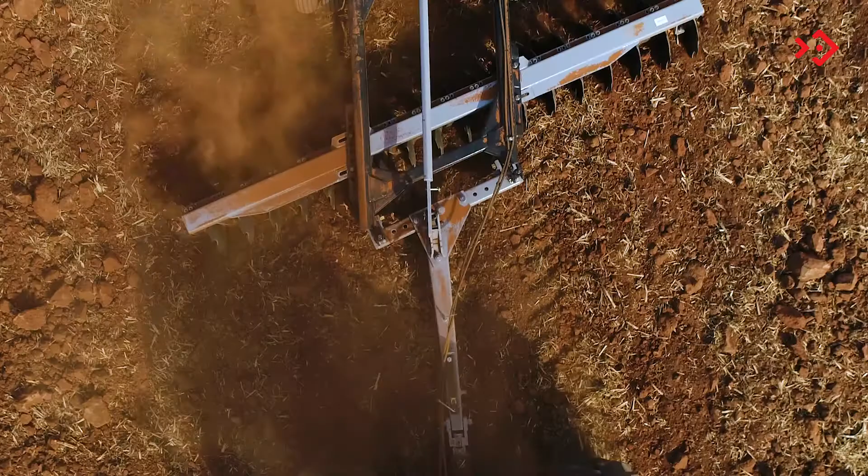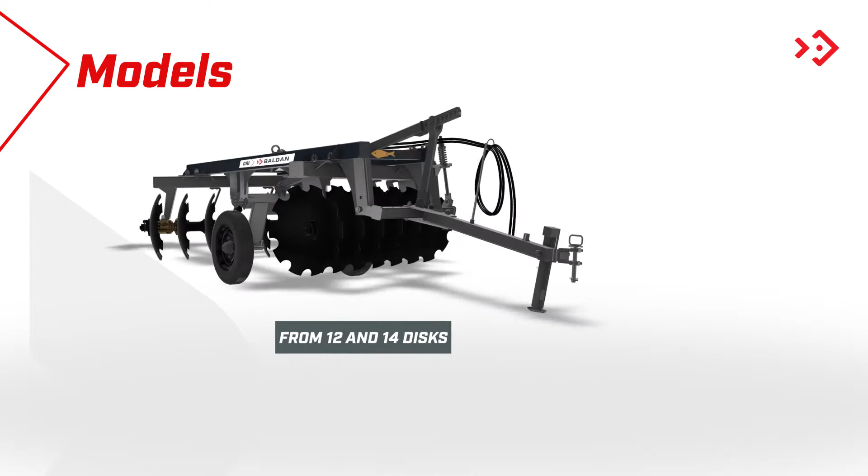Today, let's take a look at the CRI, a harrow with excellent performance in the preparation of various types of soil and excellent work performance. The CRI comes in 3 categories: 12 and 14 discs, 16 to 30 discs, 32 to 44 discs. These category variations serve the small, medium, and large producer.

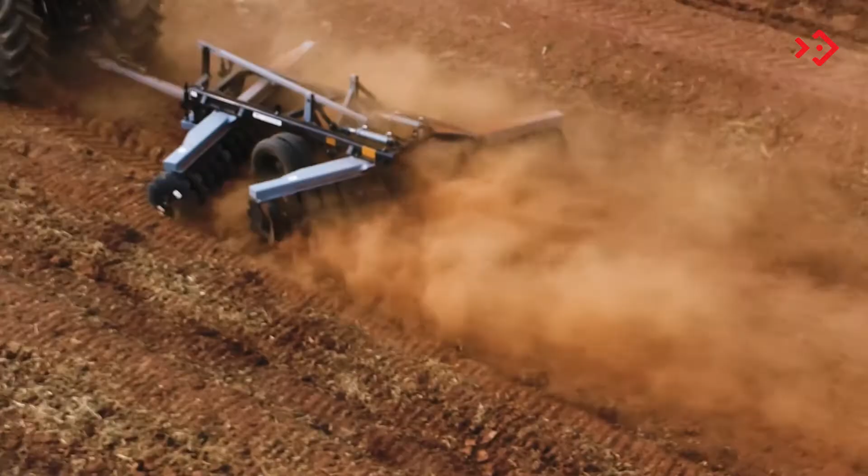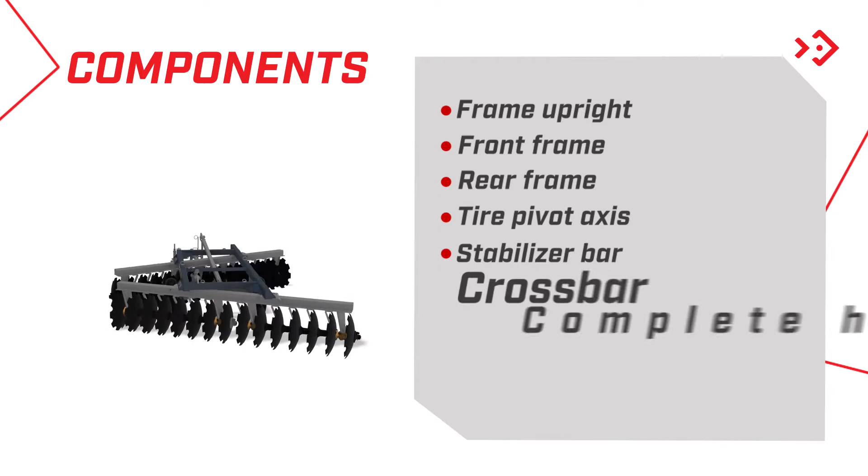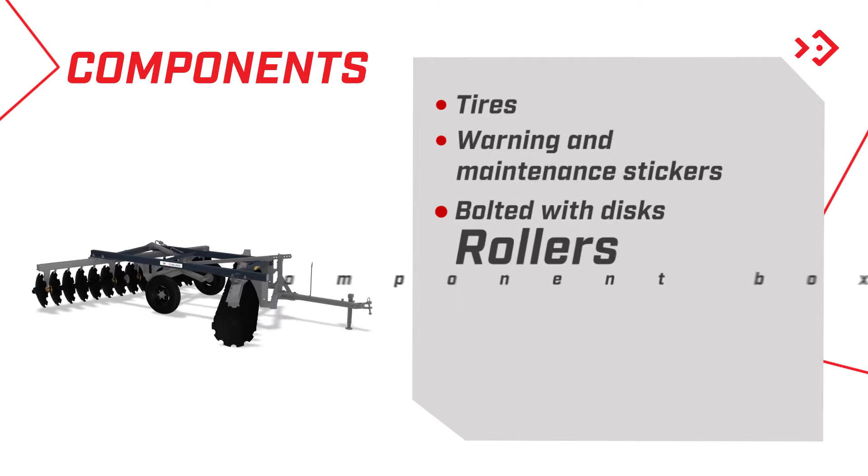To ensure that nothing important is missing from the assembly, I will pass on its main components here. Come on! Frame upright. Supports the harrow frames. Front frame. Supports the front section of the discs. Rear frame. Supports the rear section of the discs.

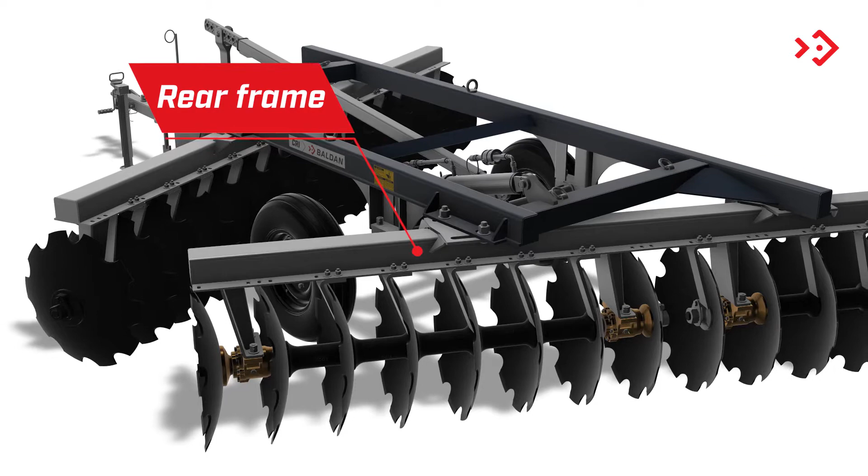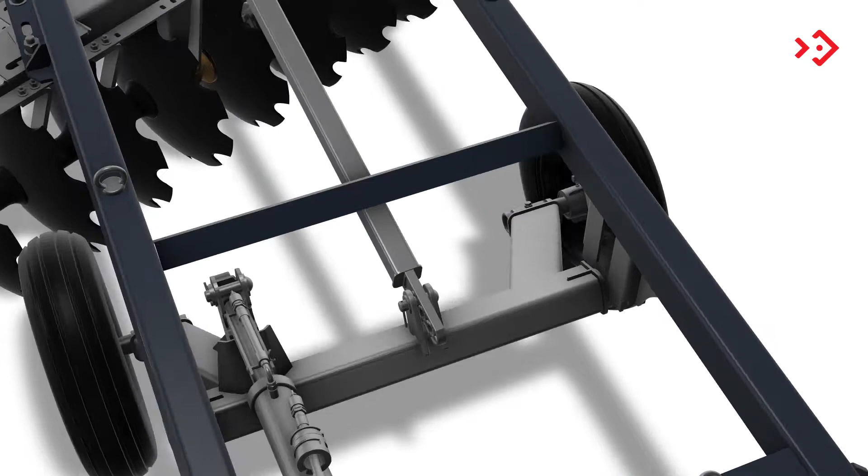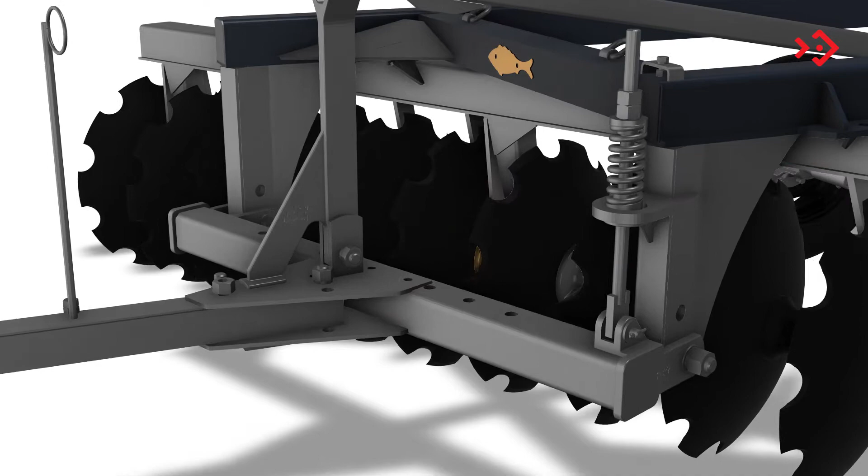Tire pivot axis. Connects the wheel to the harrow. Stabilizer bar. Levels the harrow during transport and assists the operator during coupling. Crossbar joins the harrow to the header. Complete coupling header joins the harrow to the tractor through the crossbar.

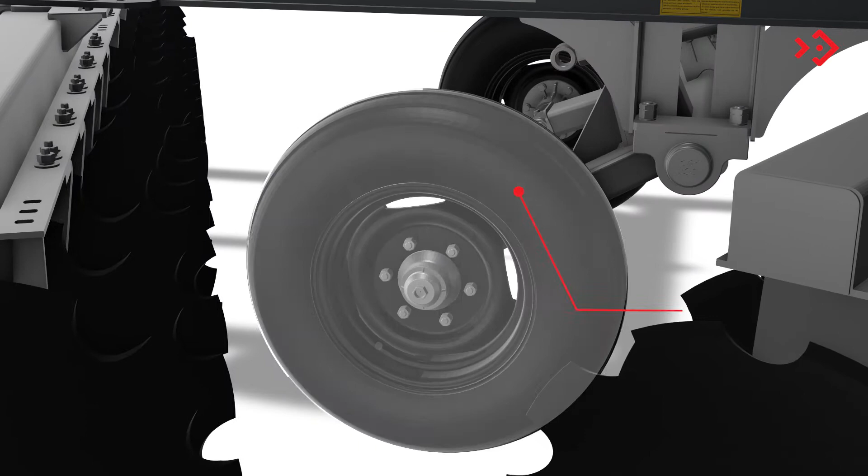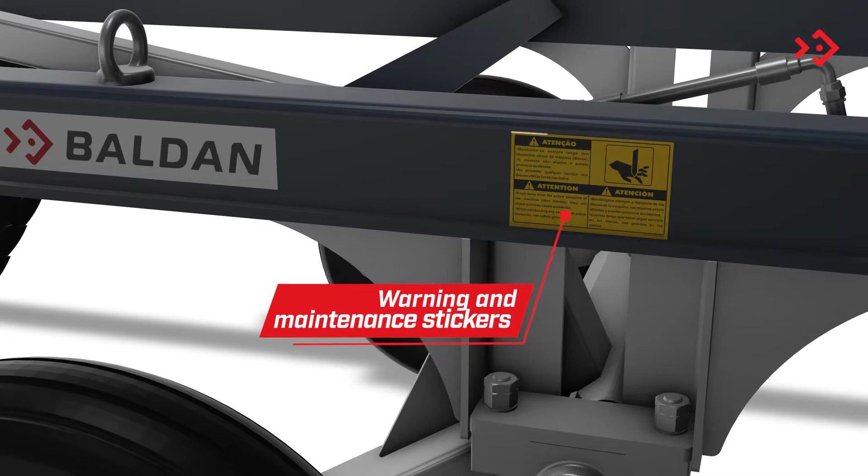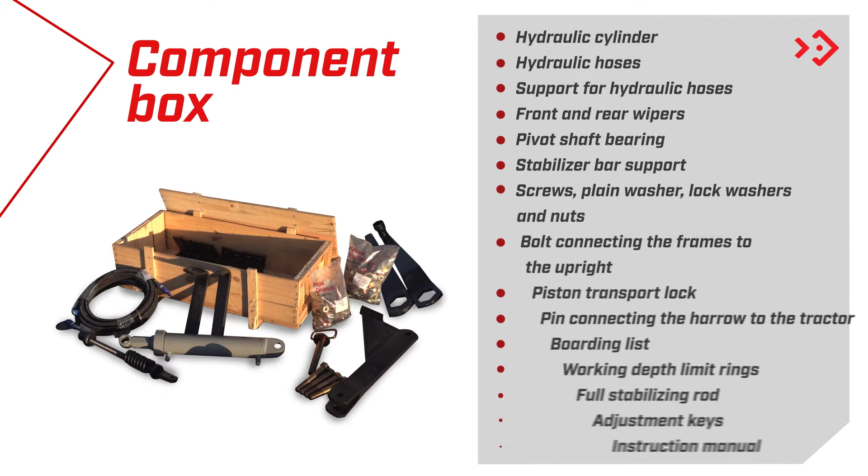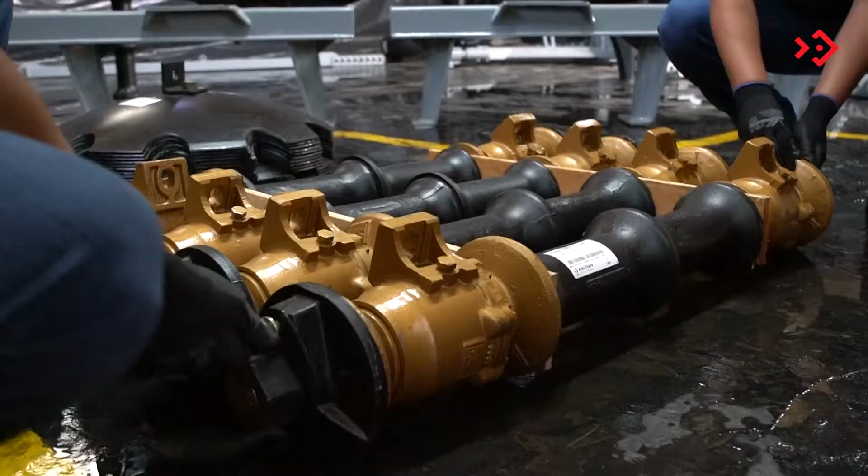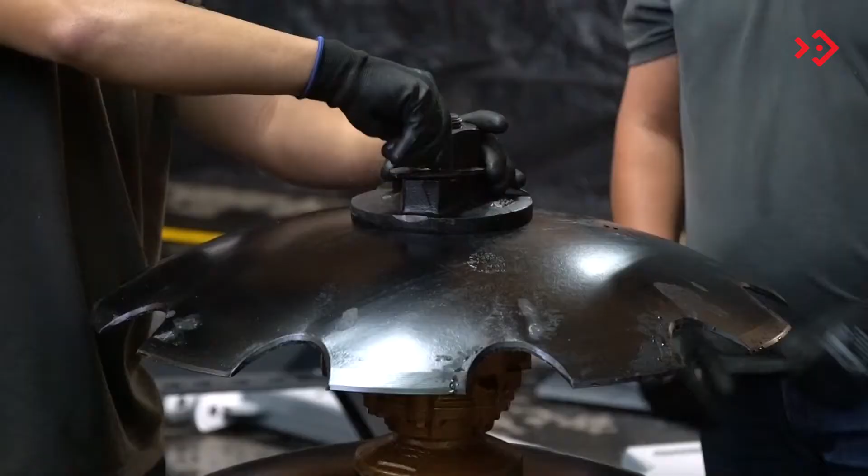To facilitate transport and optimize the value of freight, the CRI leaves the factory disassembled, okay? When receiving the harrow, you need to follow some important steps to get it ready for the first use. First, assemble the disc sections according to the model purchased. Repeat the process for all sections.

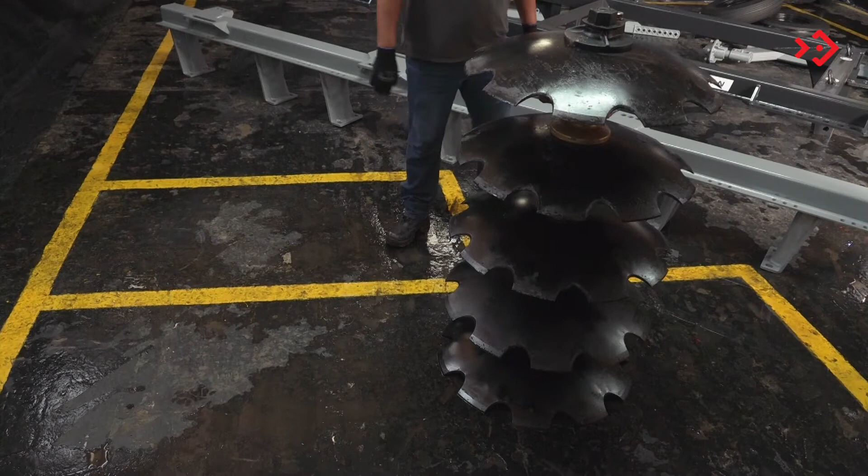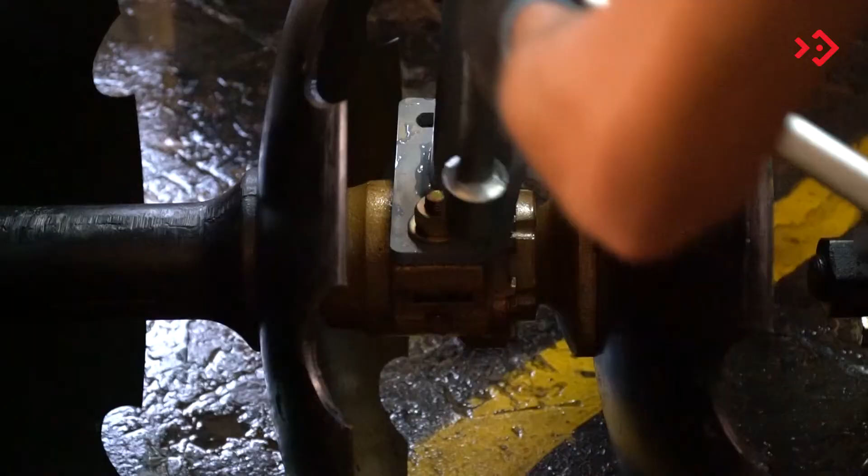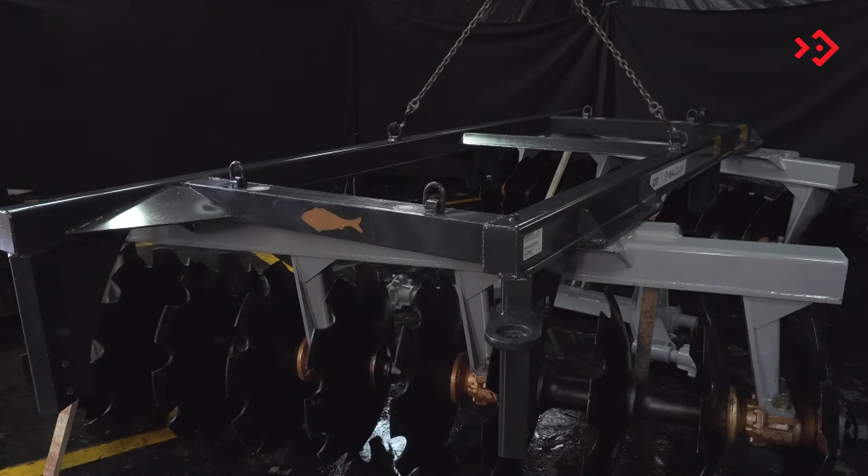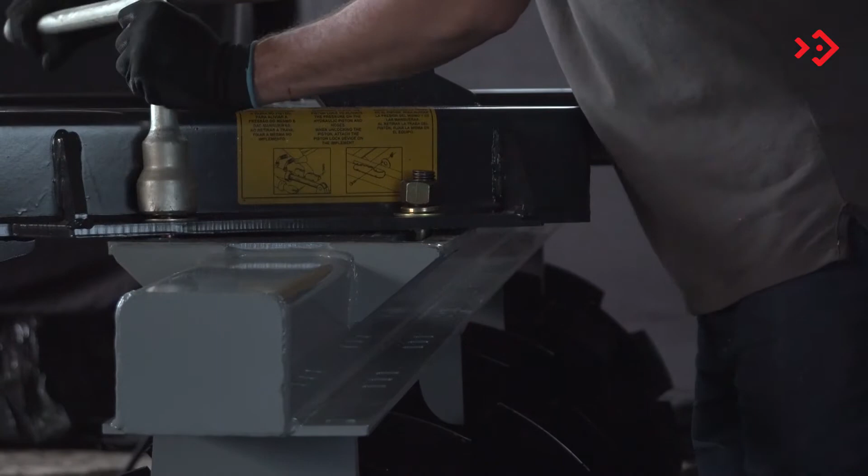Then, place the front and rear frames on the disc rollers. Then, connect the front and rear frames to the frame uprights. Now it is time to put in place the articulation axle of the tires, joining the bearings to the uprights of the frames.

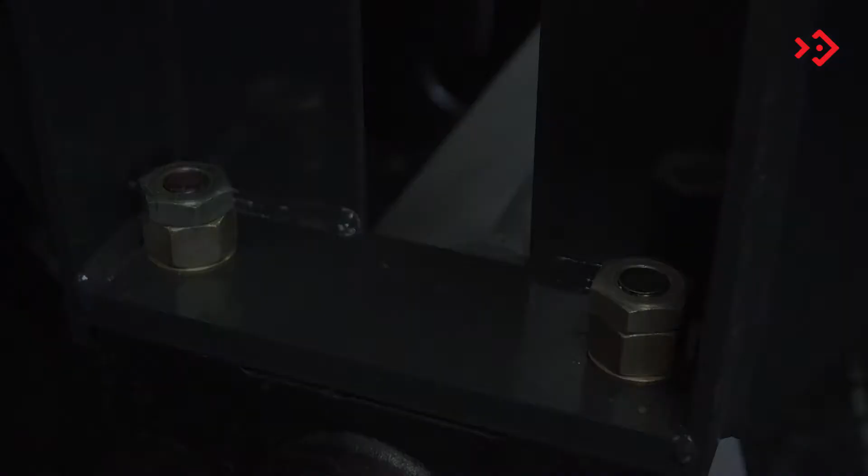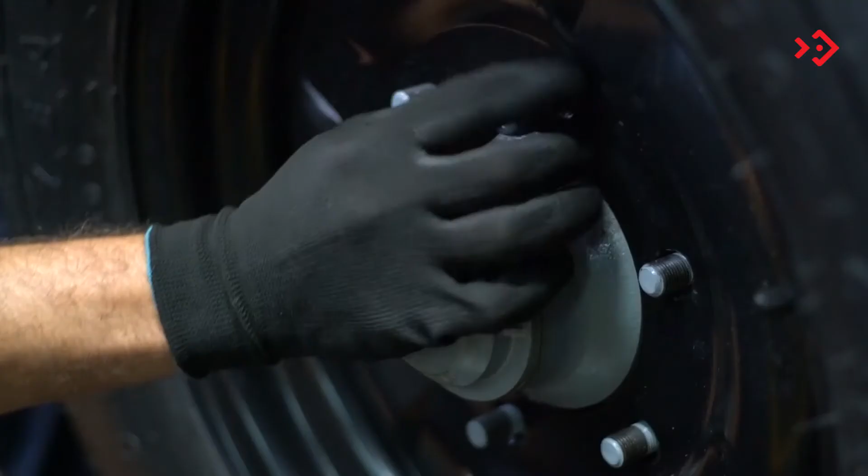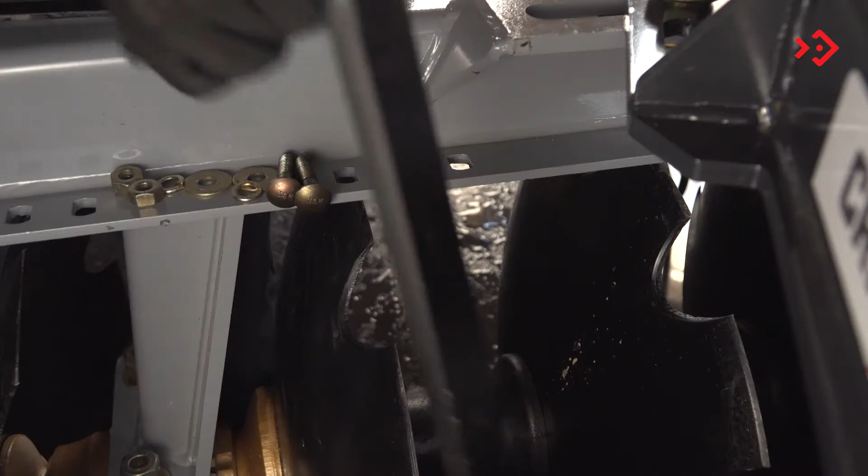Remove the wheel hub nuts and fit the tires. Then replace the nuts. Then place the front and rear wipers. Pay attention to the correct position of the wipers.

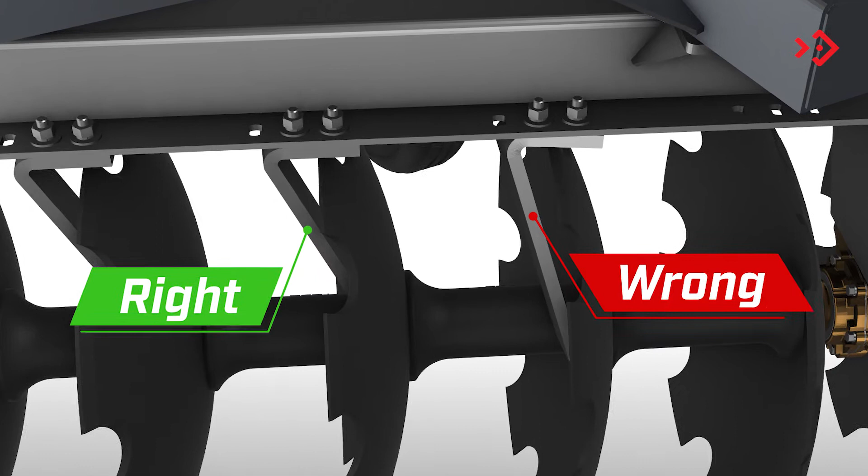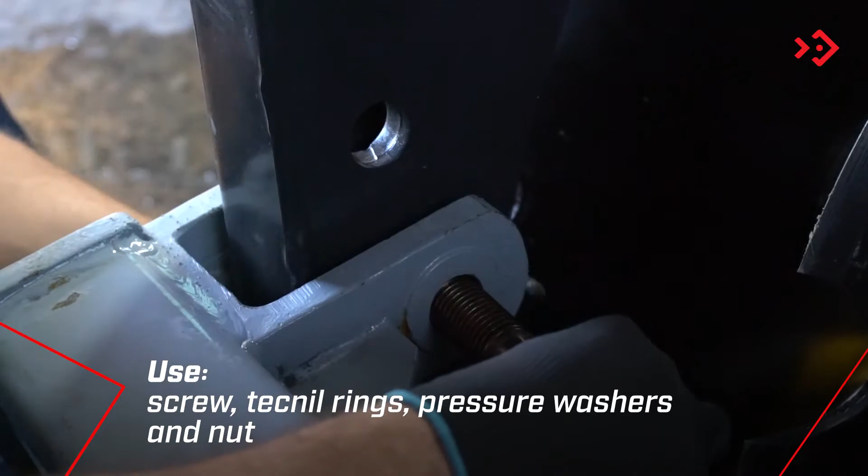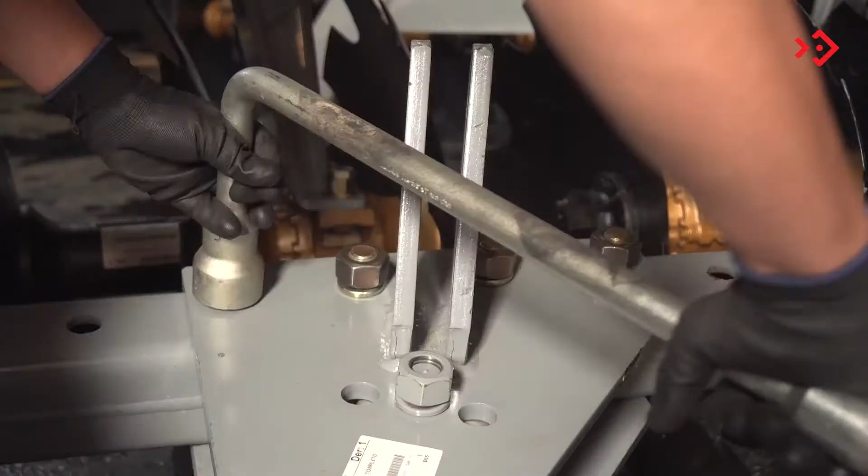Now, let's assemble the header. First, put the crossbar in place. Then, place the coupling header through the upper and lower plates. Place the stabilizer bar.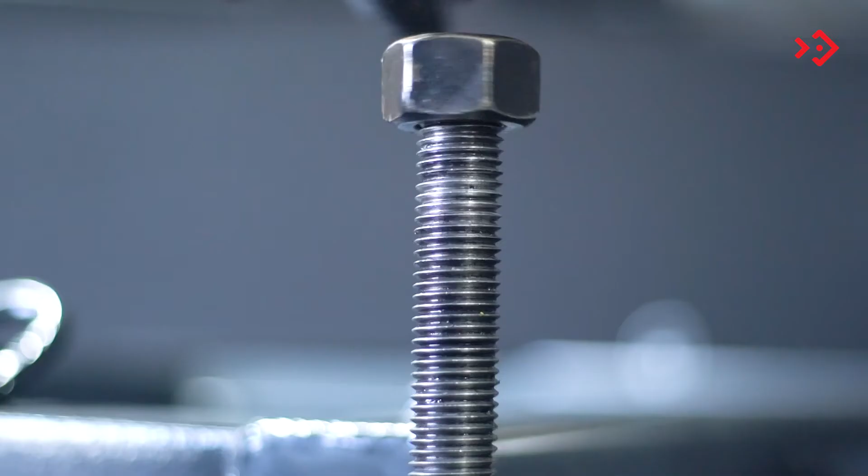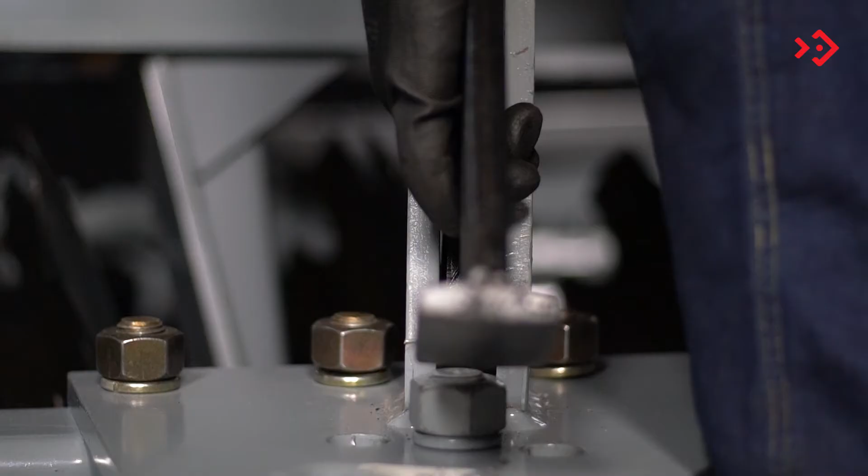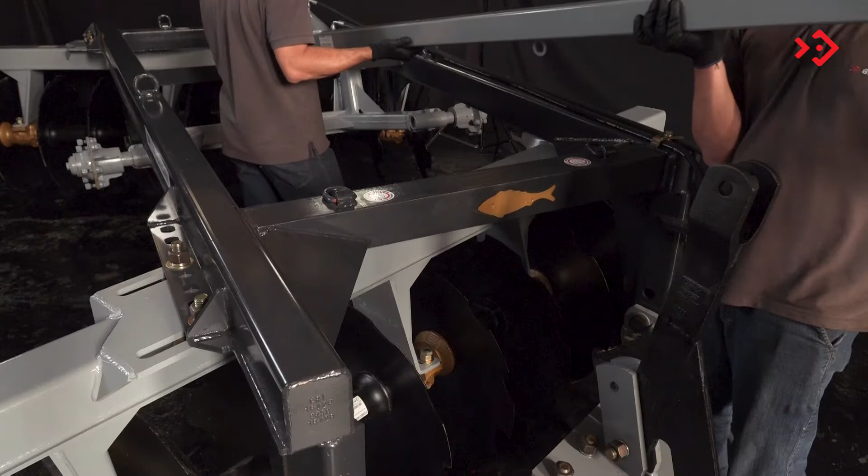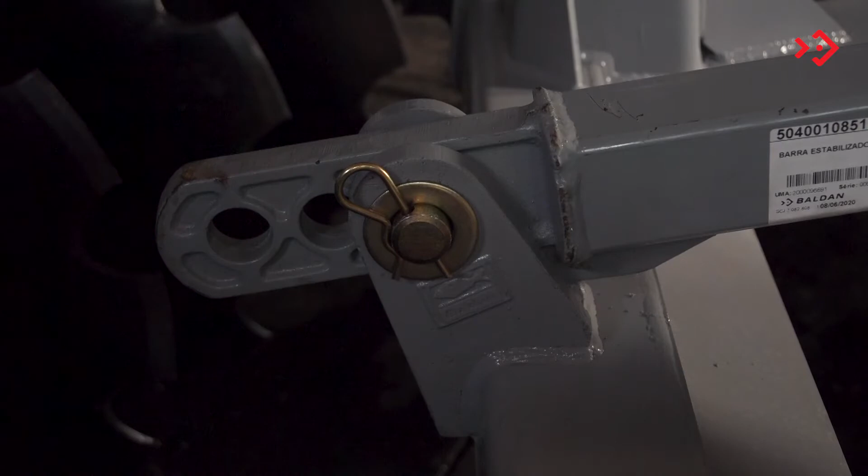Attach the hose support bracket to the header. Attach the stabilizer bar support. Fit the stabilizer bar to the support and the pivot axis of the tires. Place the hydraulic cylinder and hydraulic hoses.

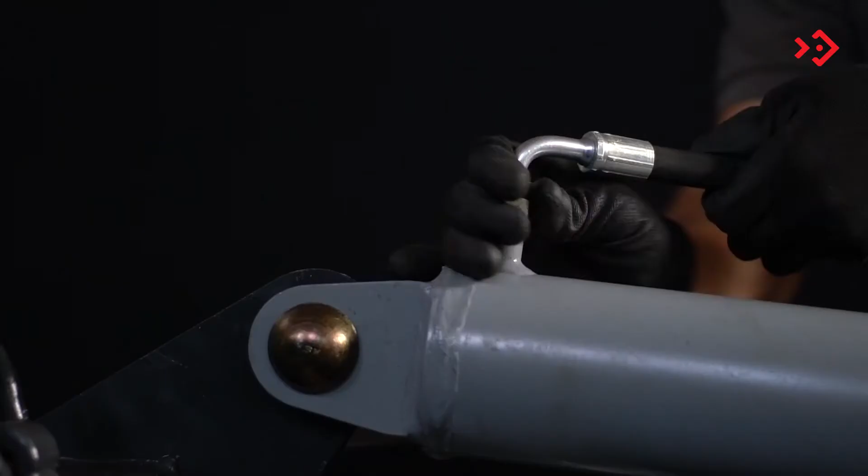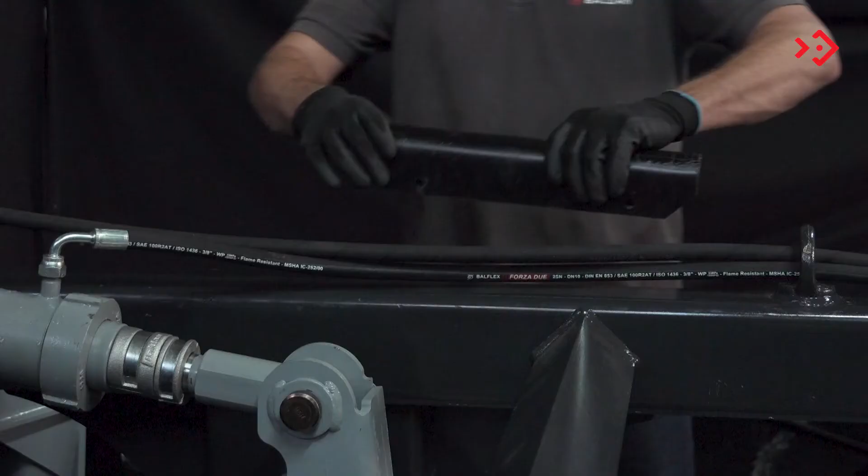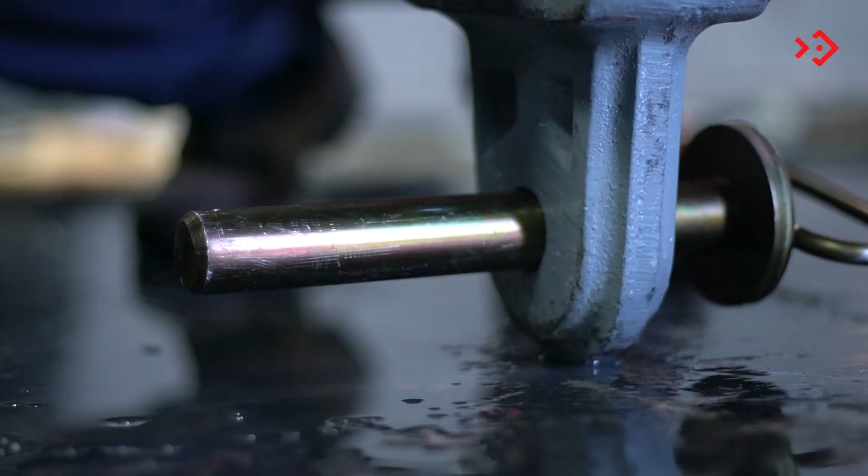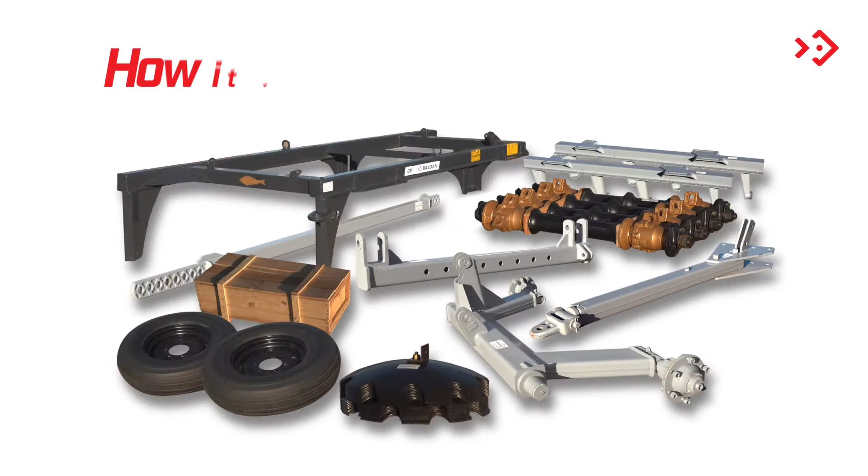Place the limit rings attached to the hoses, close to the hydraulic cylinder and the piston lock. Fit the harrow union pin to the tractor. If necessary, perform the calibration according to the table. Lubricate the points indicated in the harrow manual. All ready! See how the harrow arrives, and how it should look after you have completed the assembly.

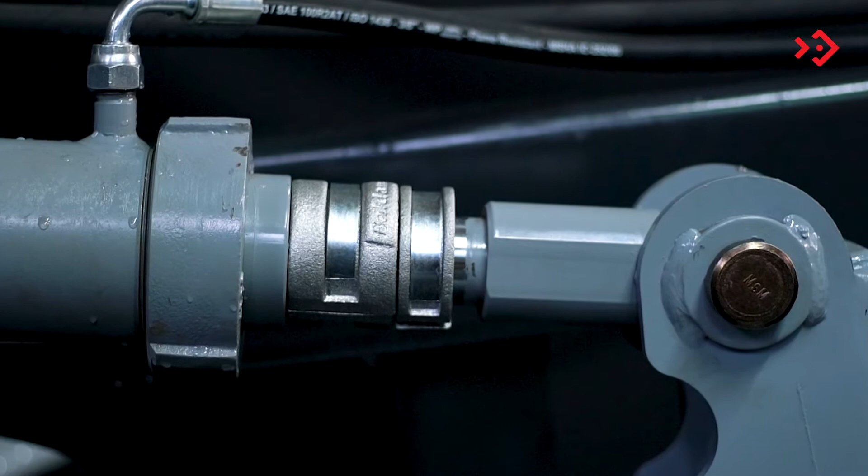Now, let's learn some possibilities of adjustments that the harrow has. The cutting angle can be adjusted according to the need to increase or decrease the depth of the discs during work. The adjustment is made by opening or closing the front and rear frames, which are on the right side of the harrow. The machine leaves the factory with 2 limit rings that also assist in the control of working depth. To do this, insert or remove these rings from the hydraulic cylinder, as needed.

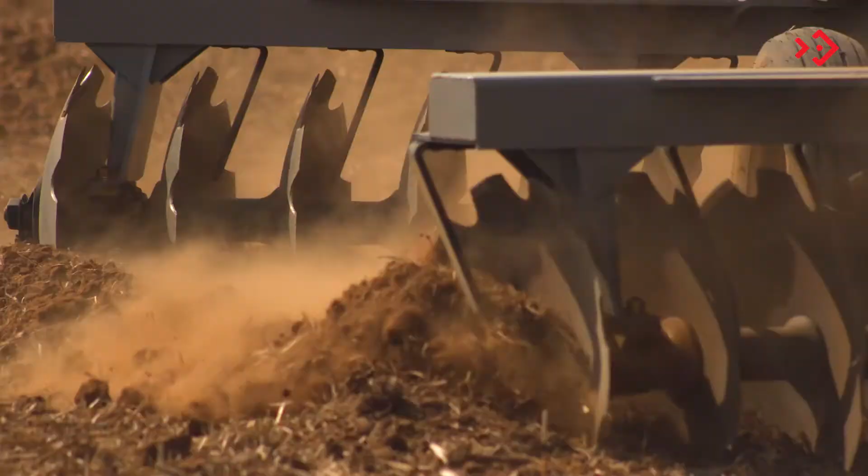Cross the discs to further increase your work performance. This adjustment is made through the 3 holes on the left side, both in the front and rear frames. The frame upright must be adjusted so that the coupling header is as level as possible with the drawbar. This adjustment is made in the 2 coupling holes from the upright to the crossbar.

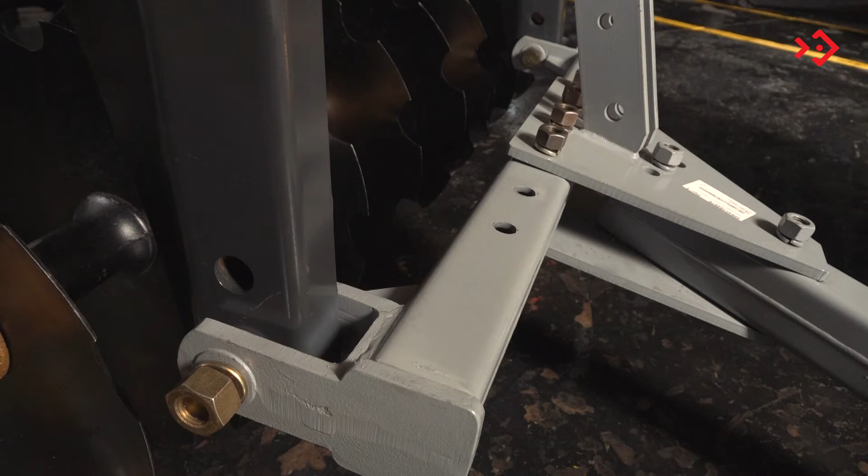The harrow can be moved to the left or right as needed. This adjustment is generally used when the tractor is wider than the harrow. In this case, position the harrow to the left of the tractor. To do this, use the holes in the header crossbar. You can increase the cut of the front and rear disc sections through the 3 holes in the harrow header.

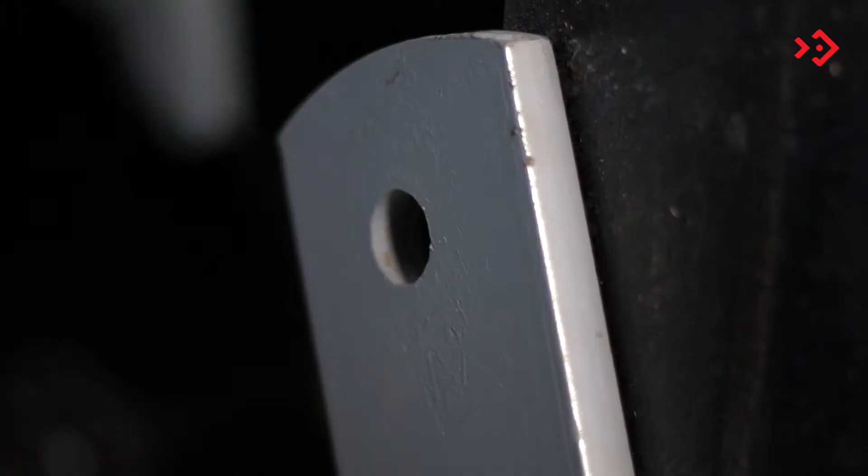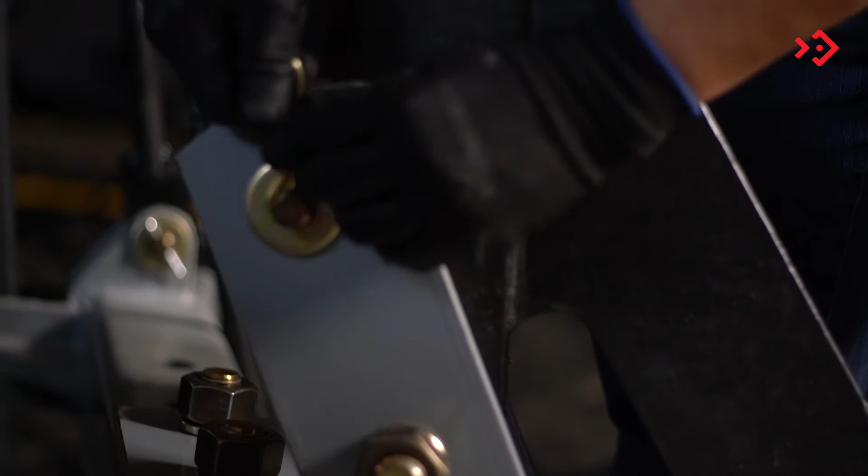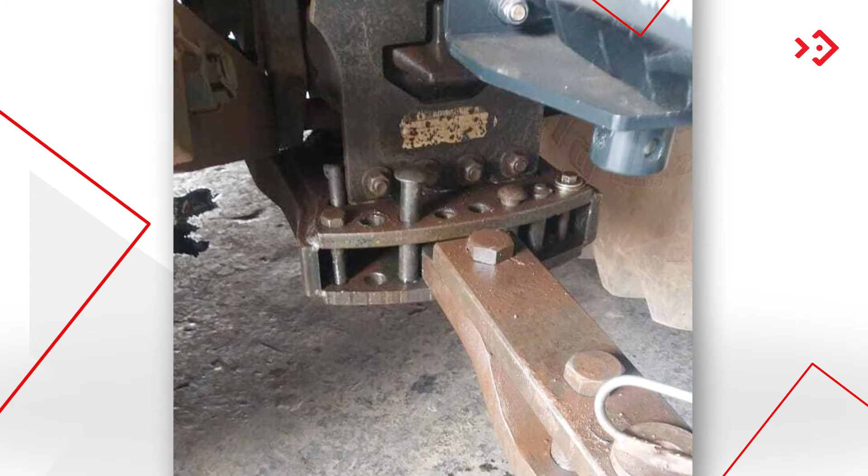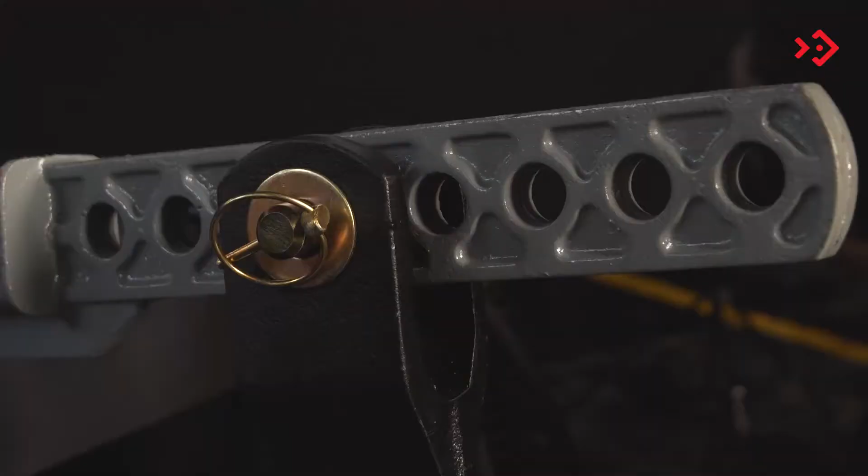Coupling is performed by joining the bar support and the upper header plate, using the pin and activating the hydraulic cylinder. During work, remove the pin from the drawbar on the left side of the tractor. Replace this pin during transport. Adjust the stabilizer bar according to the tractor's drawbar so that they are level during transport. To do this, use the holes on the front and rear.

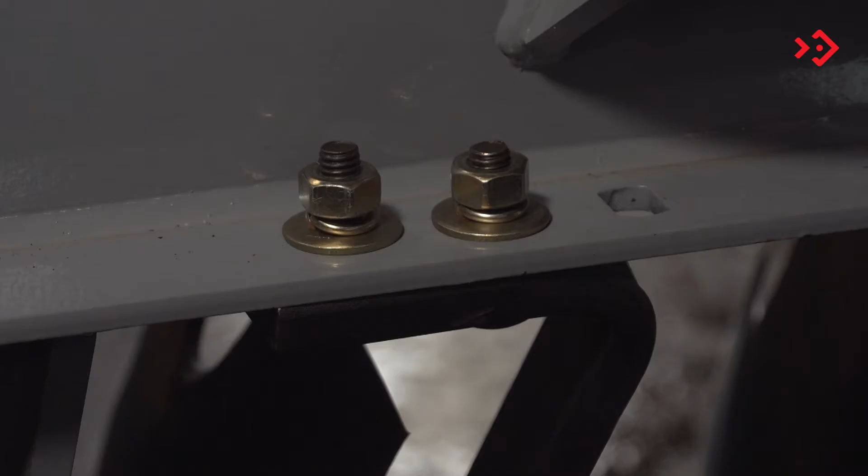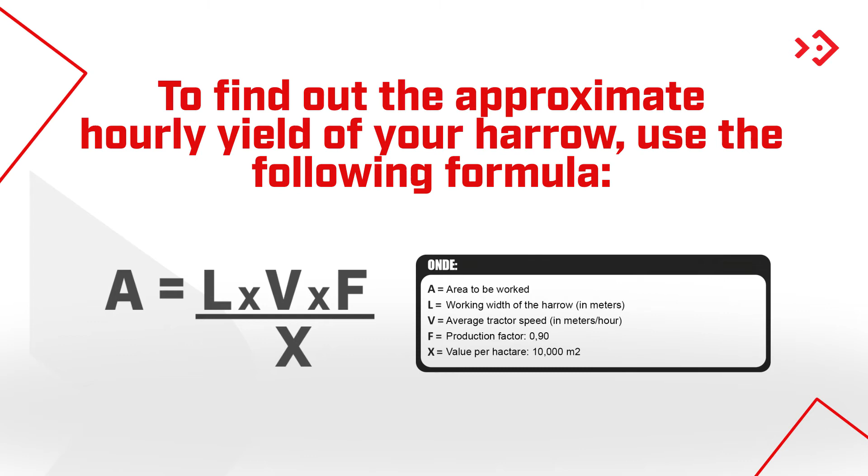The harrow must be fixed to prevent a seesaw effect during transport. Use the stabilizer rod for this purpose. Disc cleaners should be adjusted according to the type and humidity of the soil. For this, use adjustments that allow them to be brought closer or further away from the discs. To find out the approximate hourly yield of your harrow, use the following formula. Here are some important tips to extend the life of your CRI.

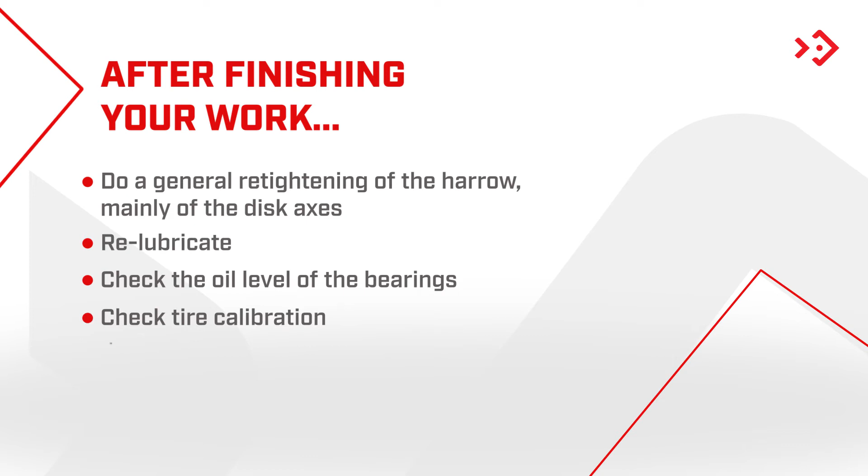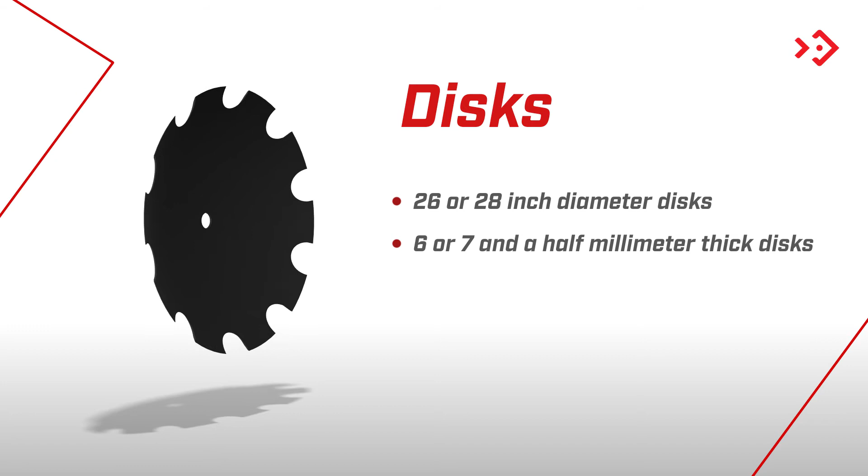Did you know that you can upgrade your CRI? That's right! Baldan's staff offers options that can be purchased according to your needs. Just take a look. 26 or 28-inch diameter discs. 6 or 7.5 millimeter thick discs. Bearings with oil or grease lubrication. With or without impact protection. Or even with an axial seal.

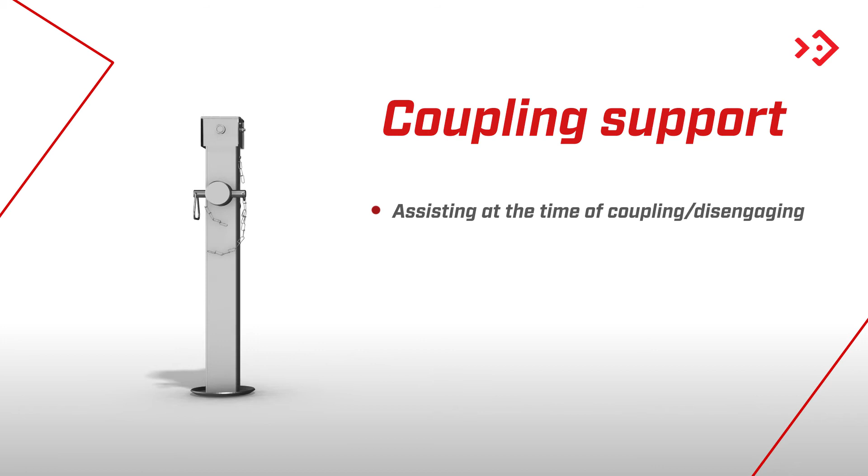Coupling support, which has the purpose of assisting at the time of coupling, disengaging, as well as supporting the header when the harrow is disengaged. Disc cleaner. Single or double wheels and several tire options. Always consult a Baldan dealer to find out which options best suit your working condition.

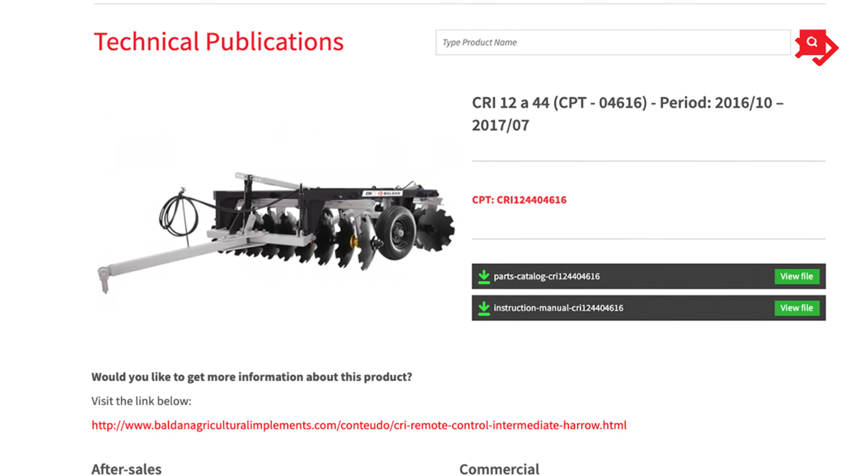Your harrow is unique, so it's important to keep your identification visible for any consultation, okay? The nameplate has model, serial number, manufacturing date. In addition to a QR code, which is scanned with your cell phone, it leads directly to the instruction manual, parts catalog, and also this video. It's that simple. Oh, and so that no one runs out of information, your CRI also comes with a printed version of the manual that comes along with your invoice.